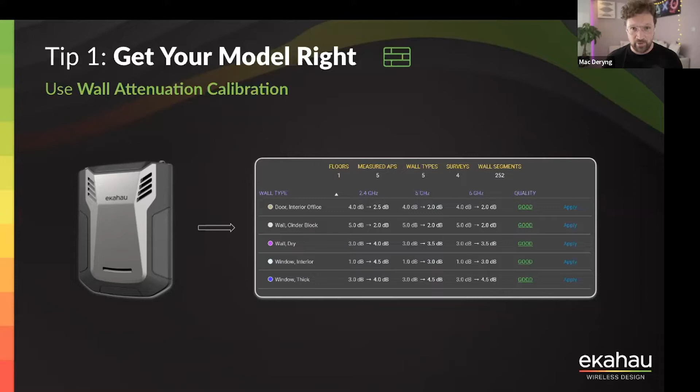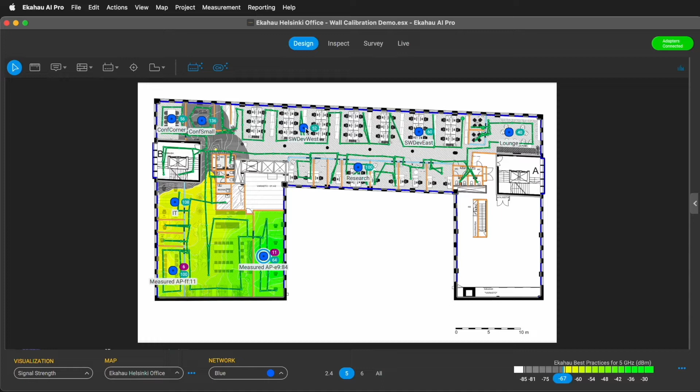Let's do it. So I'm going to get that ready for you now, Mac. The wall calibration tool in Ekahau AI Pro is such an amazing new feature. I truly want to cry from happiness each time I'm using it. It allows us to use validation survey data to calculate real attenuation values of all the walls, therefore creating a spotlessly accurate building model for us to use in a predictive design. All we need to do is to walk with our Sidekick on both sides of all the walls we want to calibrate the attenuation of. Preferably use a Sidekick 2, as it's mega fast and it measures attenuation across all 3 bands.

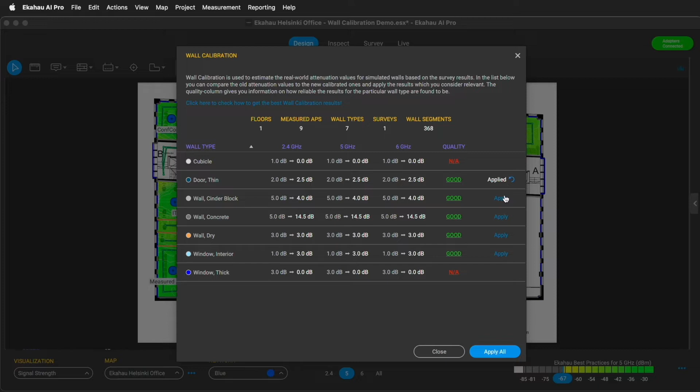We initially use wall profiles built into Ekahau AI Pro. You can draw the walls before or after the survey. It doesn't really matter. We then fire up the wall calibration tool to see Ekahau's suggestions for each wall type used in the project. If we have enough data points captured on both sides of the wall in question, we then see the quality of the attenuation prediction marked as good in green. Sometimes our wall attenuation assumptions are wildly different to the real measured wall attenuation. For example, we thought that this thin concrete wall has 5 dB of attenuation, where in fact it has 14.5 dB. This might translate to an increase in the number of APs that we need to cover this space with. We can apply the suggestions one by one or apply all of them at once.

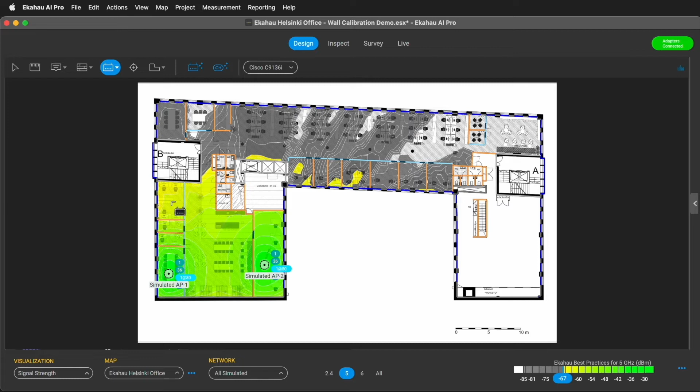Notice that calibrated walls were added to AI Pro and are now used in the project. You can now remove your survey routes to clear up the project file and enjoy the calibrated, accurate building model that you can now use for your predictive design. Take the guesswork out and get your design right first time. Yeah, Mac, you said it, but I think this is one of my favorite new features of AI Pro.

Being able to take out that guesswork and knowing what is behind those walls is kind of like magic to me. So the combination of the Sidekick plus AI Pro to find this out for you. And I remember back in the day when me and you, Mac, was going on site, knocking on walls, trying to figure out how much this was attenuating the walls and what is that behind there, and having to manually do it. It's such a time-consuming process. It is indeed. I can't say I miss those times.

And guys, if you use a Sidekick 2, it has 4 radios that we use for scanning. So all you need to have is a Wi-Fi coverage from anything. It can be a brownfield Wi-Fi, it can be AP on a stick, whatever you have, it's good enough to use to calibrate wall attenuation automatically.

Yeah. Well, that was our first tip, Mac. So why don't you tell everyone what is our second tip? I will be delighted to do so. So first tip was to get your model right. Easy peasy, lemon squeezy. Now, tip number 2 says design for your real devices. Use device offset, mind LCMI.

What does it mean? It means that wherever you do a Wi-Fi design, you have to understand what device you are designing for. LCMI, it stands for least capable, most important device, and it will be different in different environments. In a warehouse environment, it can be a handheld scanner, for example. In enterprise carpeted office space, it can be a smartphone or a tablet.

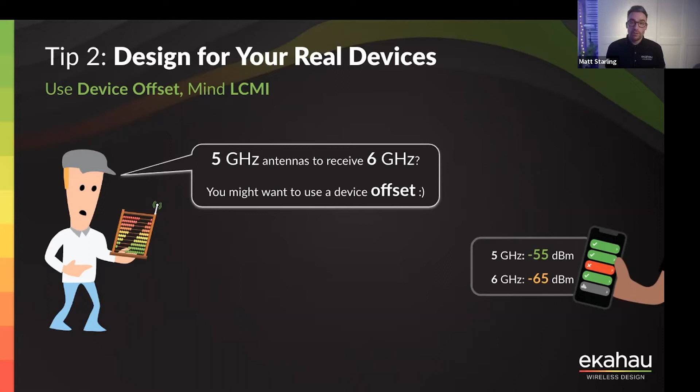Yeah, I found that really interesting where people will talk about client devices and testing them, that quite a lot of the 6 gigahertz client devices out there on the market are using 5 gigahertz antennas. So that does play a big impact. And the good news here is that you can configure these device offsets. So once you do your testing, you can configure that in AI Pro to make sure that you have got everything accurate just how you would like it to be.

So why don't we move on to our tip number 3 then? And that is always design and never assume. So what are we talking about here? We're talking about, again, another amazing new feature in AI Pro, which is called the Network Simulator tool.

I'm flashing back to our days again of doing professional services, Mac, and a lot of our customers, when they were at the point of their Wi-Fi lifecycle upgrade, they would just want to rip down their current access points in their current locations and then install the latest and greatest access point model that is currently out, because it can be quite expensive to have a new design done or run some new cables and rip this all out. And they think that if I just put up these brand new access points, it's going to fix all of my Wi-Fi issues.

And for us to try and explain that to customers was quite challenging, to say, hey, how you wanted the Wi-Fi to work a few years ago is completely different to your expectations for how you want it to work today. So you really would benefit from having a new Wi-Fi design done and making sure you get it right first time, get the right number of access points.

You don't have to go through all of that pain of buying a certain amount of access points, physically ripping them out and physically putting them back in, and then you and the users being disappointed that the Wi-Fi was not working how you would like it to be. So we actually have this amazing new feature that can show you what it would look like to upgrade to a new model of access point in the same location.

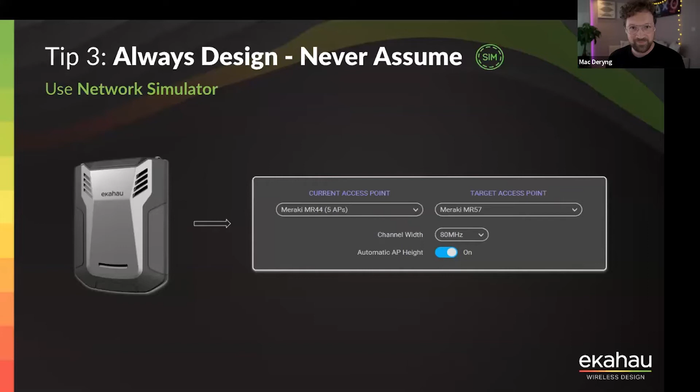So guys, just to reiterate what Matthew has said, you cannot rip and replace one-to-one from old APs to new APs if you don't have a decent design. And sometimes, even if you do have a decent design, rip and replace will not work as expected. So instead of talking about it, as always, let's take a look. Yeah, I'm really excited to show this to everybody. So here we go.

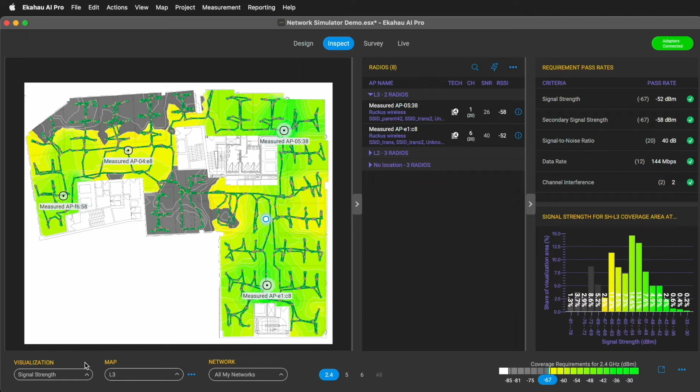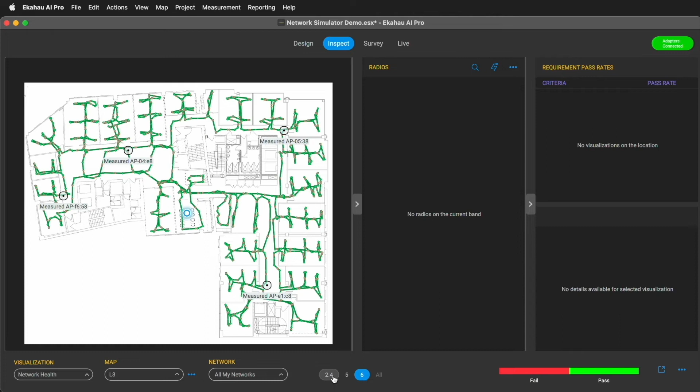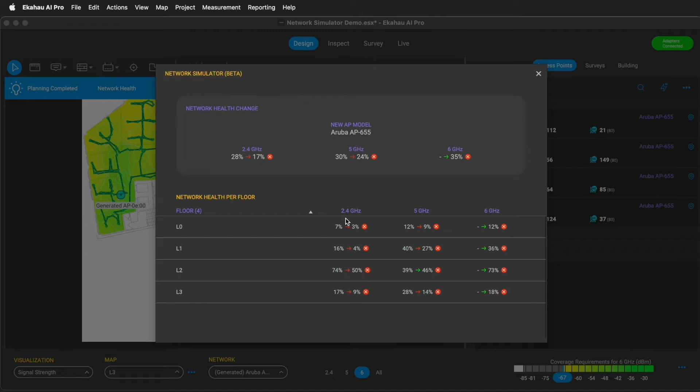We often hear claims that replacing vendor X with vendor Y will fix all your Wi-Fi issues. But is it really the case? Let's see what happens when we change current Ruckus APs to brand new, shiny Aruba 6 GHz enabled access points. Are our coverage issues fixed? Network health has not improved at all. In fact, it has dropped across both 2.4 and 5 GHz bands. An addition of 6 GHz in brand new APs might have added some capacity, but it didn't really fix our primary and secondary coverage issues.

You can compare the one-to-one AP rip and replace simulation by switching between the generated network view to see predicted performance of new APs and all my networks to see the performance of your existing network. As you can see, simply putting in new 6 GHz APs didn't solve our issues. You can't fix bad design with newer hardware. Spotless Wi-Fi design is the key to amazing Wi-Fi.

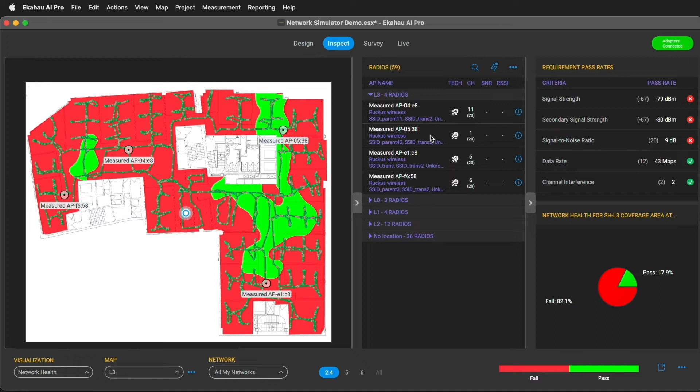And Mac, I could not agree any more with you right there with that statement. Thank you very much. Nothing unusual, Matthew. I wanted to say for the first time I agree with something you said, but no.

Great. We always agree. Okay, so that was the network simulator, and that was tip 3. Okay, and let's move to tip 4. So tip 4 says save time, use AI. And to do that, we can use Ekahau AI AutoPlanner to save us time. No matter what frequency band you are designing for, you can use AI AutoPlanner.

So AI AutoPlanner, guys, uses the requirements that you specify while working on a predictive design. Based on those requirements, based on the wall attenuation that hopefully you have calculated using a wall attenuation calculation tool, you have an amazing model, you have your coverage areas done right, you have your capacity requirements specified in a way where they are not exaggerated, not underscoped, as close to being right as possible. Of course, it's not possible to do it 100% right, because we cannot predict what people are going to be doing all of the time, but we have to be reasonable while setting up the requirements. And then you run AI AutoPlanner to place access points for you on the map.

And AI AutoPlanner can be used by both Wi-Fi pros and those just starting their career in Wi-Fi. For the Wi-Fi pros, you can save time by having it place access points on the map for you, sometimes a few hundred access points across multiple floors. And most likely, the placement of the access points will be spot on after running it. If not, you can always move some APs around so it satisfies your needs and OCD.

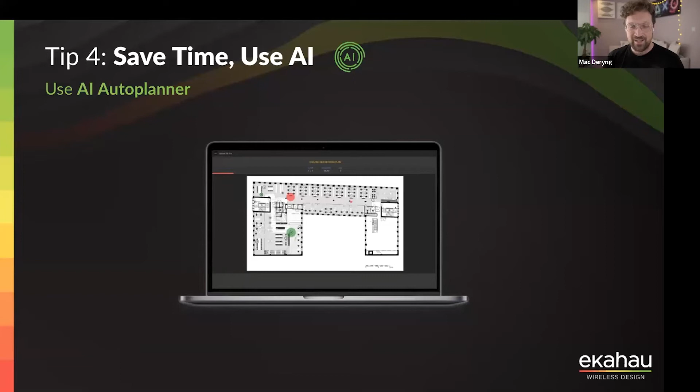So it's super easy to start using, doesn't matter how much experience you have. But instead of talking about it, let's take a look. Let's see how we can help save you time, but also get your Wi-Fi designs right first time with Ekahau AI AutoPlanner. What we have got here is a predictive model with 3 floors inside of this predictive model.

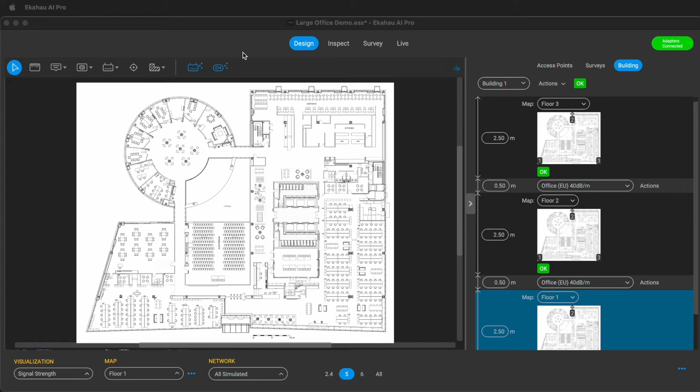So to run the Ekahau AI AutoPlanner, I'm simply going to click on this blue icon, which will open up our AI AutoPlanner window. And then the first thing that we need to do is select which model access point we would like to use for our design. And we have got thousands and thousands of access points, and I'm going to select this Cisco 9136i access point for this design.

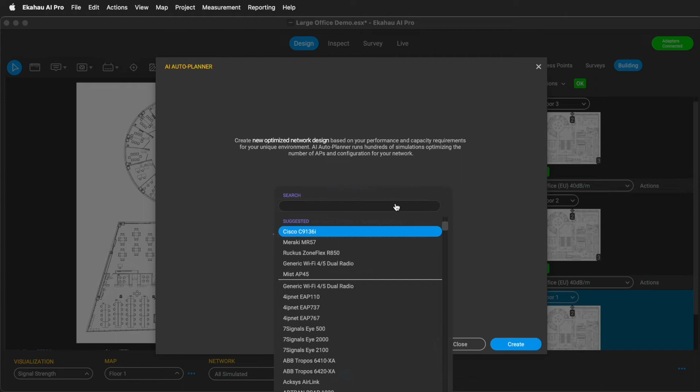Once we are happy with the AP that we have got selected, we can then expand our advanced options. Inside of our advanced options, we have lots that we can configure here, from the transmitting power we would like to use on all 3 different radios to the antenna heights. And what you might notice here is that across the 3 floors, we have got areas configured with devices too. So we can ask the AI AutoPlanner, when it's doing its design, to also take into consideration the capacity requirements of your devices and their SLAs inside of the areas that we've got configured across multiple floors, simply by hitting this optimize with capacity toggle to be on.

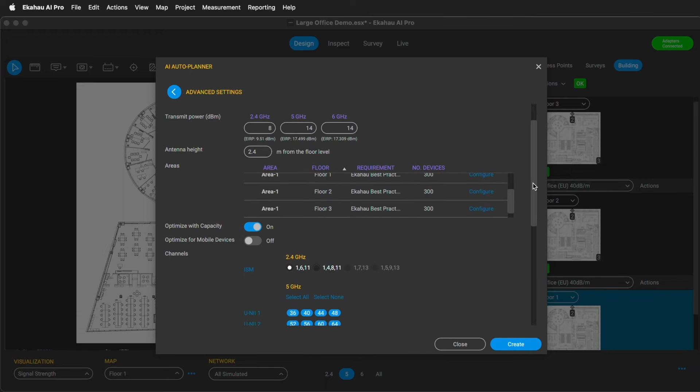Once we are happy with that, the next thing that we can configure is the channels that we would like to use inside of our plan as well. We can select the 2.4, 5 and 6 gigahertz channels which we would like to include in our plan, as well as which bandwidth or channel width that we would like to use on the different frequency bands as well.

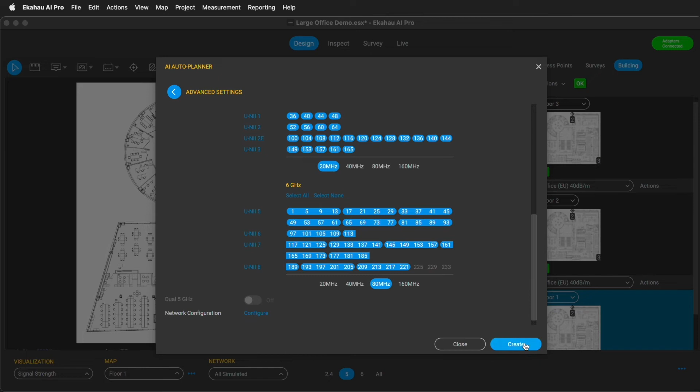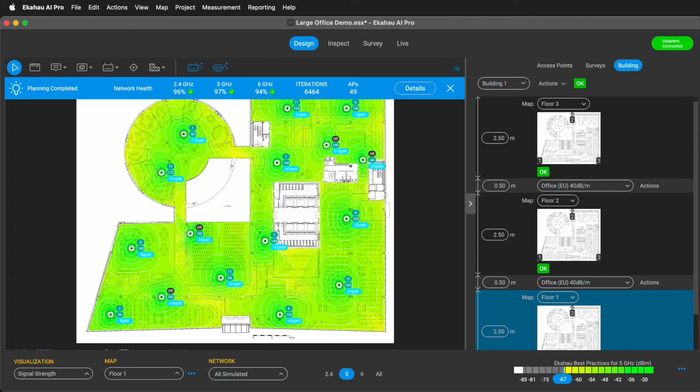So once we're happy with this, we can then simply hit the create button and our AI AutoPlanner is going to start preparing to deploy our Wi-Fi network for us, and we can see the dancing APs moving around, and then whoa, oh my goodness, look at all of those iterations that the AutoPlanner is crunching through right now, going over multiple different positions for the access points and the configurations.

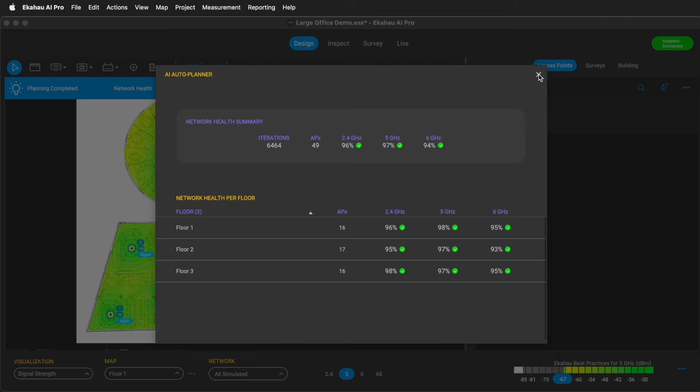Then once the AutoPlanner has deployed the network for us, we can see now that we have got 49 access points placed across the 3 different floors, and we can then check the details of our network health summary. So how is the Wi-Fi performing across all of those 3 floors? Are we meeting our requirements? And we can see all of those beautiful green ticks, which means we are meeting our Wi-Fi requirements across all 3 frequency bands across all 3 floors, which is pretty cool because this was only a matter of moments before this was deployed for us.

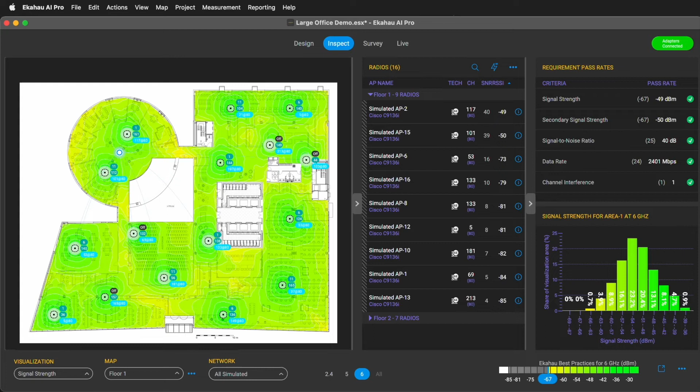Then if we would like to dive into a bit more detail, we can select the inspect tab and we can select some locations across the floor plan, and we can see our passing requirements, and we can check out what is happening in the different specific locations across our floor plans to make sure we are happy with how the Wi-Fi has been deployed. So it is as simple as that. We can create a high performing Wi-Fi network for you at a simple click of a few buttons.

How amazing is that? Yeah, I mean, I personally love using AI AutoPlanner to be able to save some time when designing across multiple floors, and it really is a click of a few buttons.

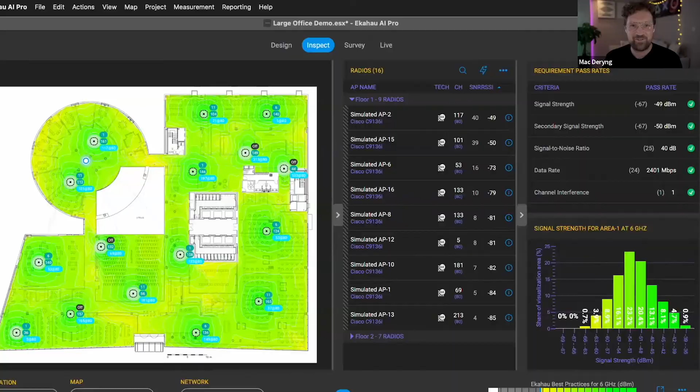And Mac, I know you love those. Everyone likes different things, because I will be playing the AI AutoPlanner demo at my Christmas table to show the family the dancing APs in green and red, so they look like a Christmas tree.

So guys, that was AI AutoPlanner. Let's move on to the next tip. And the next tip, number 5, is to cover what you want. And I really am super excited about this tip, because you actually can use directionals with 6 gigahertz now, or almost you can use them with 6 gigahertz now.

So 6 gigahertz, when it was introduced and the first access points hit the market, we only had omnidirectional internal built-in antennas to play around with the LPI device class. LPI stands for low power indoor, and this is the first class available to us in 6 gigahertz. Without diving too deep into what LPI is, let's just remember that LPI, low power indoor, allows us to use fairly low power.

It can be used only inside, and it doesn't require any external databases to tell us what channel to use, what transmitting power level to use. We can use it inside as we please. So it's very similar to what we know and love about 2.4 and 5.

Since we are discussing the classes, before we jump into the directional antennas, let's talk about standard power as well. That's a second device class available to us, almost. So the difference between LPI and SP, standard power, is that you can use standard power both inside and outside, and you can use higher power on your radios. But it also has one additional requirement called the AFC.